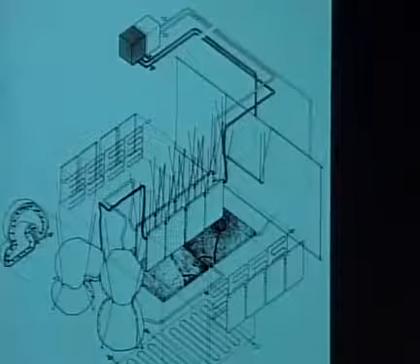It's an exploration of the perception of space using a full range of body perception mechanisms rather than just the visual ones. It's a hot plate, cold plate system—there's a system of hot water and chilled water within this symmetrical, visually identical bifurcated space. There's absolute visual sameness, but a range of other differences between the two sides.

And you're blinded by the light, which was a reference to the type of light you get in Alaska—this low, horizontal, blinding light that is felt as a sensation more so than as a visual wavelength of light. It's a kind of blinding light.

Within this blinding light, we constructed bladders and radiators and systems for bringing different heat sensations. Then there was saltwater mud that we brought up from the waterfront—one half of it was cold, clammy mud, and one half was very warm mud. So there were very different smells, very different sounds, very different kinds of sensations.

Within this physical structure, we were very interested in how do we visualize this thing, having first denied our visual reading of it—how do we give some visual form to our other senses? So we started exploring infrared video, and we were able to perceive the space as this much more complex, dense space. In this case, this is the real person, and we're not seeing visual wavelength light—we're only seeing heat energy, the heat reflection embedded within the architectural construction.

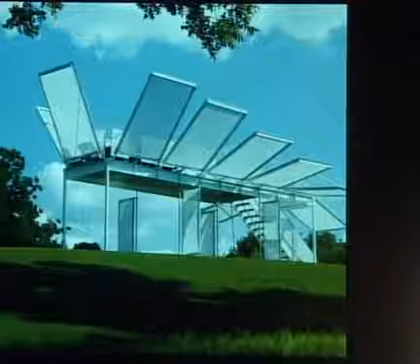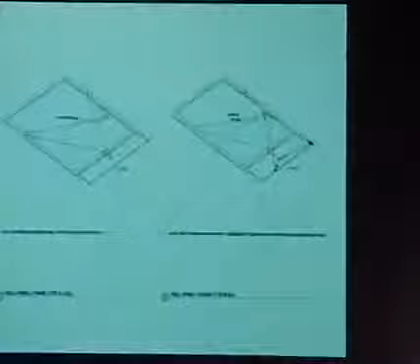More recently in Texas, we built a small structure—a shade structure, shade pavilion, and living roof demonstration project. It's a kind of traveling, folding mechanism. But all of these things are armatures for the creation of experience. As a construction, the actual form and material construction of it is less interesting to us, or secondary in its design focus, than the sort of perception and human experience that it makes possible.

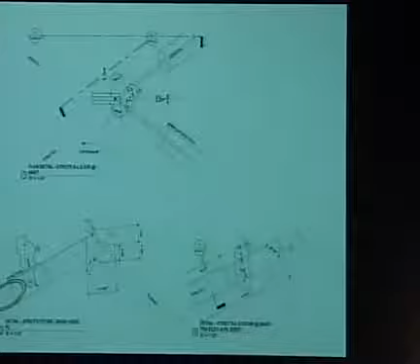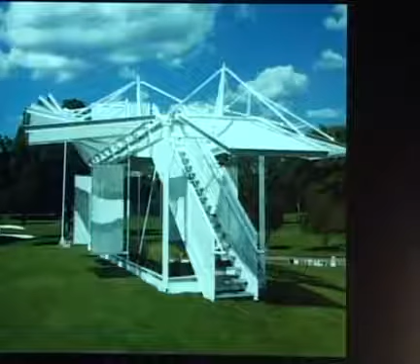And these are things that we'll show you in some of the other built projects. So there's that background of the subject matter, the interest in terms of what we're producing that's a little broader than just the details. The details themselves are interesting, but details on their own are not really the objective of architecture.

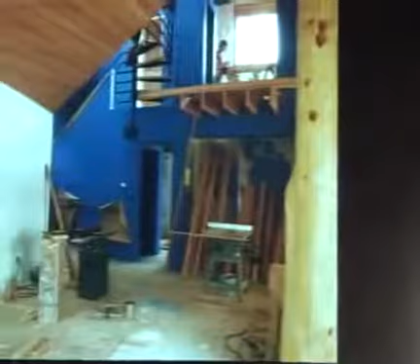So that's the landscape, if you will, of the work that we consider site-built or site-dependent. Some of our work involves a combination of on-site and off-site production, particularly a series of houses that relate to how things are made and how they fit into the landscape. We started our business as a construction company before we were licensed as architects, and that gave us the opportunity to start designing things, but also a tremendous learning platform to learn about materials, space, and how things can connect to the landscape.

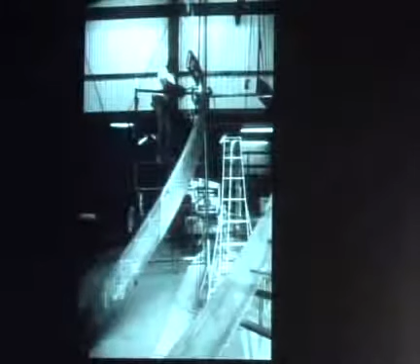So I'd say the study of the site and how a building goes onto the site is a central theme to all of this. It also sets the theme for the fabrication of any parts that are going to be brought into the site. Another part of the landscape, besides the physical, environmental, or natural landscape, is the industrial landscape, the set of tools and resources out there for making things. So in addition to studying the topography of the land, we're always interested in the topography or landscape of the means of production.

So for instance, with this complicated steel stairway, the first thing we did was try to find the places that could roll steel for us. This happened to be on the tide flats, the industrial processing place shown in the picture Mark showed at the beginning. The design came completely out of a series of conversations back and forth with the people who would actually be able to bend the structural members, and the interaction with the making, both our own hands-on part, but more and more working towards interactions with fabricators and people we could work with.

So we understand that in the same way a landscape is a rich source of inspiration, it's a collaborator in a way with any project. I think that influences a lot. We started working a lot with wood, and now more recently a broader range of materials.

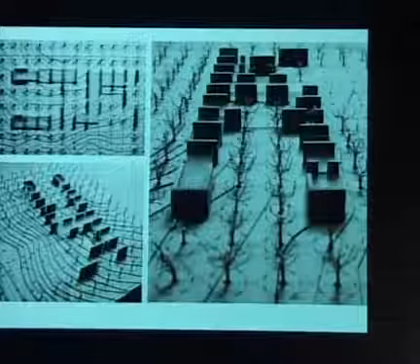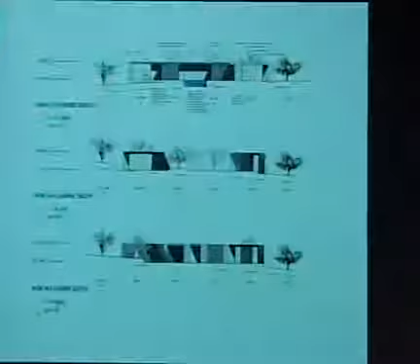Based on that, we started introducing building elements into this void, first in models. We modeled the whole thing, we modeled all the trees. And we decided that the solid building elements had to maintain the same rows as the orchard, because we were aware that the space of this site is the space between the rows of trees, and we didn't want to block them with buildings. So we said the rows of the trees have to all be glass or open space, and the solid concrete structure had to be on the line of the trees.

These are actually the construction drawings for the building. We put every tree—we drew or photographed every tree—they're in all the construction drawings, so there's no mistake for anyone working on the project that the project of the building is about the building and the trees. You can see from these that the trees are all taller than the buildings. It was one of the important goals for us, keeping the building within the context of the trees and lower than the trees.

So we made this series of concrete cast-in-place elements using mobile modular forms, columns and concrete elements, which are all on the lines of the trees. This image, looking out from the kitchen, is probably a good way of seeing it—straight ahead into the picture is the alley of space between the rows of trees, and on either side of us are the rows of the concrete columns of the house.

We're trying to create an atmosphere inside the house where the floor goes right out into the dirt and the ceiling goes right out into the sky, to connect us in. The whole wall system opens up as a series of doors—there really are no windows in the building, they're all doors, all made out of recycled wine casks made out of redwood. So there's a very limited palette of materials on the building.

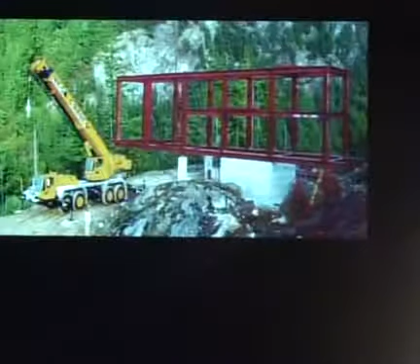To give another example of extreme interaction with the site, this was a beautiful 150-acre site up in the mountains north of Seattle. It had a very big site, but very little buildable area. The owner actually wanted us to design for another site, and we kept trying to convince him, and eventually did, that this was the site we needed to build on, one he thought of as unbuildable.

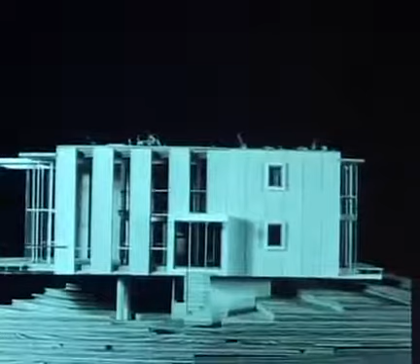What became important to us was to lift the building up off the site, make the smallest possible foundation, and then cantilever the building out in all directions. At one end it cantilevers 35 feet, and at the other end about 20 feet. It's a steel structural moment frame, a Vierendeel truss frame we designed to allow the small footprint and cantilever out essentially over this cliff. This is a very different kind of building from the previous one, which was about sitting low on the site. Here it made more sense to be up above the site and cantilevering out.

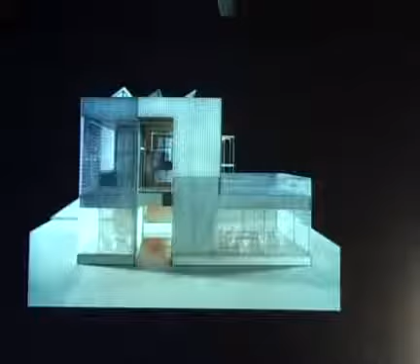Moving around the country, this is New Mexico now, a very beautiful and specific site on a river. The owners wanted a building that would be a house for themselves, but they also had a lot of domestic animals, in a very wild site in Abiquiu, New Mexico. They needed to separate their domestic animals, which included plans for goats and chickens, from the wild animals roaming the desert landscape. So the house was conceived from the beginning as a kind of multi-cellular cage — cage usually sounds unpleasant, but it's a very diaphanous, open cage.

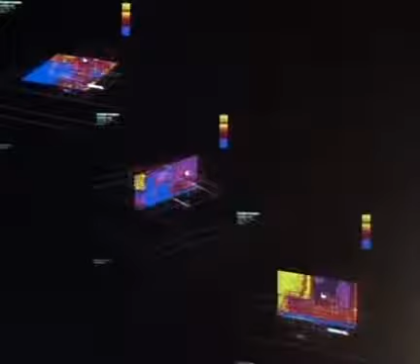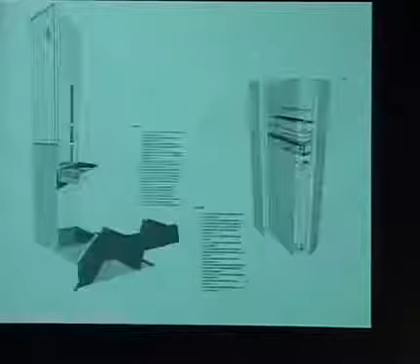The connection to the landscape included a very high elevation, so we did a lot of studies on how to get sun in for passive heating in the winter onto a concrete floor that would absorb warmth, while excluding light from those thermal retention areas in summer when the sun is hot. So we started doing a lot of work with Ecotect — I don't know if that's software you use — to study the many ways the building interacts with the site. I think this marks a transition for us, from the more intuitive understanding of a site gained from being on it, to using more analytical tools and definitive information to help form the ideas of the buildings.

Lastly in this series, another orchard project, very different — this is the one on the poster we saw. It's a house in Michigan that sits above a cherry orchard. Here, a tiny site is set within a huge agricultural landscape, and the goal was to get as high as possible, over the cherry trees, to look out at a view of a lake. The house is only 1,600 square feet, spread over 12 levels — really 5 stories, but half levels, with each room off half a level.

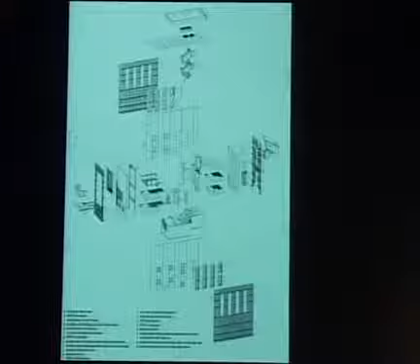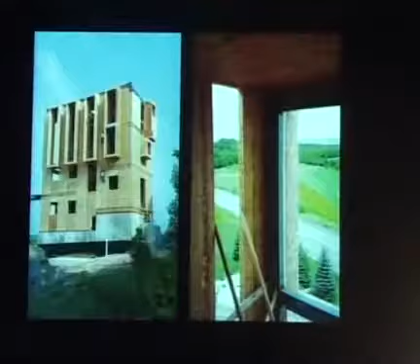In this case, the importance of the building to us was getting up high above the site. The exterior enclosure is all reflective metal surfaces, with a separate level of plastic louvers that collect and redistribute light. So part of the goal was to have the house set into the landscape in a way that reflects and changes with the four seasons it goes through. The building reflects the sky — we call it the chameleon house, because it changes with the seasons and the land, reflecting its surroundings. It's not trying to blend in, but to become a connected, integral piece of the landscape. That's the series of very site-directed projects.

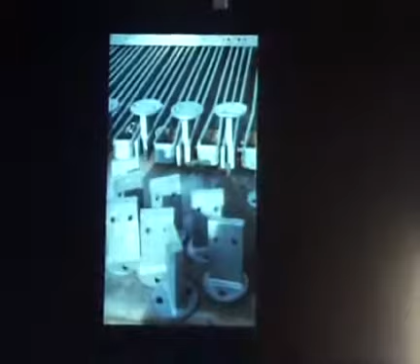But just as there's that kind of specific landscape, there is this kind of production landscape that we work within. And we've always been very interested in affordable methods of housing production in particular, and building production. We've had the opportunity to build some pretty expensive buildings for fairly wealthy people, but that's never been our primary interest. Our primary interest has been to figure out how we can make good buildings available to everybody. So we've always had this kind of parallel emphasis on figuring out a production method that is affordable, that is effective in some way.

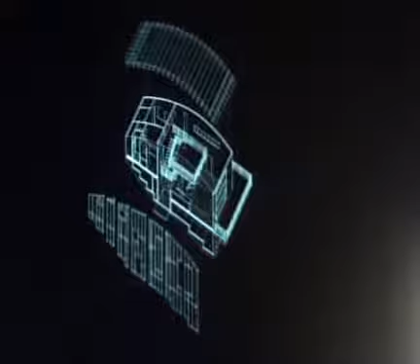One of our early projects along these lines was a house we built on Fox Island in Washington State about 20 years ago. That was one of our first prefabricated buildings that we did completely ourselves. We'd actually been working on a number of other things earlier, including for some other architects. But this one was a house for a young woman who was a teacher. She later became a firefighter, and a very interesting person, but somebody who didn't have a lot of money and wanted to do some of the work on the house herself.

So we had to really figure out how to make something that could be built very fast, very affordably, and so we developed a kind of panelized production system. In this case, we rented a warehouse and used our own construction crews between other projects and prefabricated the thing and then set it up on the site in a fairly rapid way. So that was one of our early investigations in prefabrication.

But we've always been working on numerous projects in different methods of prefabrication. This project here is in Kumamoto, Japan, where we've also done a lot of work on prefabricated buildings. This one was finished just a couple of years ago, and it's a CAD/CAM timber frame building.

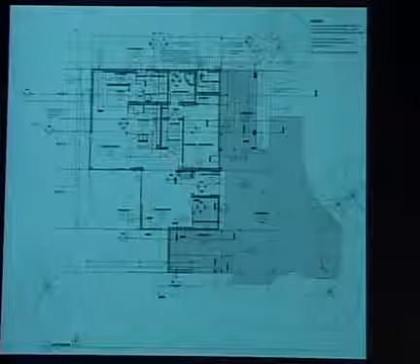So this again is intended to be - and of course in the San Francisco area, everything is kind of outrageously expensive anyway - so when we talk about an affordable house, it's still a $1 million house. It's not affordable to most of us, but compared to other things, it's a less expensive way to build. So it's a very compact, very simple house on a small site, so much of the outdoor yard space is on the roof of the house.

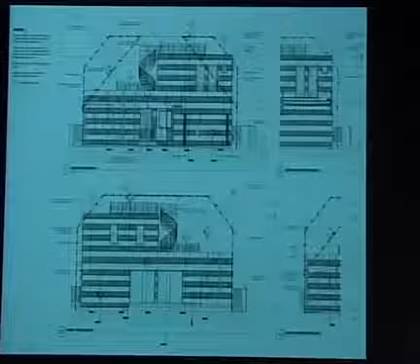This is a plan of the modules. It was trucked down in 5 modules, and each of these needs to be designed to be detached. So there are some kind of special design issues. But then the idea is to put it all back together - it's completely built in the factory, then taken apart and brought to the site. You can see they're kind of simple box-like structures, but trying to embrace that simple box-like quality and give lots of indoor-outdoor space in it.

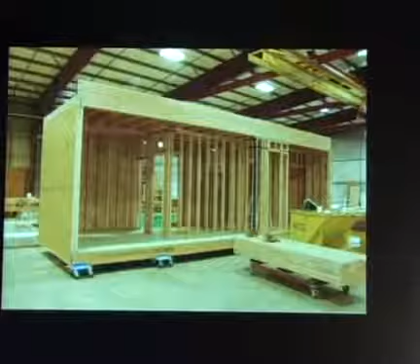So this is the beginning of the work in the factory in Salem - this is the process - and here's the house going together. It's basically very simple materials, but it's got a few special features, including this kind of wall full of holes that encloses a small bamboo courtyard.

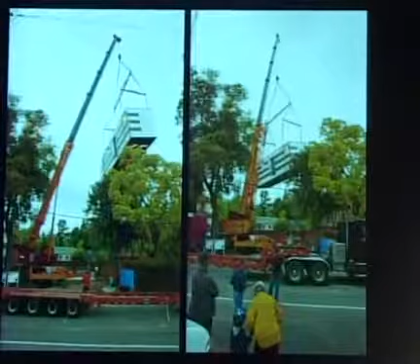It's just hardy board, simple cement board siding, so very inexpensive, but put together in a way that is a little less typical of the use of it. Here it is going over the wires and over the trees and being set in place.

Once it goes together, then at all of the module lines, there's a kind of knitting together of the pieces, and here you can see it's finished inside, but there are some areas left to be bolted together and then finished.

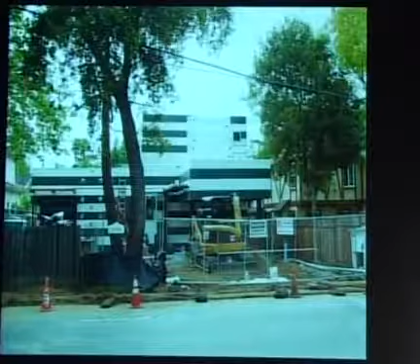So this is the interior and the courtyard wall, and this is about what it looks like now. It's just a little bit beyond this, but it looks like it's kind of fit into the trees, so it doesn't really look like it was trailered in.

So we've been increasingly interested in modular building recently because it's a little different from other modes of prefabrication. It's the kind of true promise of prefabrication where the whole thing goes together. So I'm going to show you a few more examples of current and recent modular building projects that are not residential, not houses.

So kind of thinking of the larger landscape of education-related projects, we're very excited to have had a chance recently to get involved in some projects more about education facilities, because we feel like putting the effort into very intensive design and development of things makes more sense for something that can be benefiting more people than just a single-family house.

And so in particular, this project, which is a zero-net energy classroom for Hawaii, we were part of a competitive process to find the best proposal for what's supposed to be the new generation of portable classrooms or relocatable classrooms for the state of Hawaii. They use a lot of them.

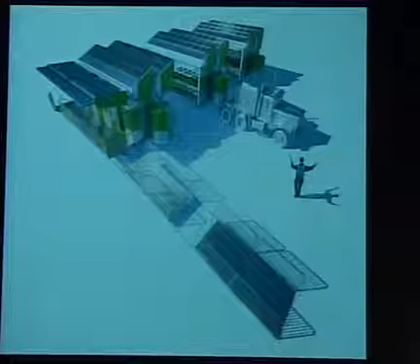Many of the classrooms they have are in very poor condition. So they decided to have this kind of idea to have a prototype for a zero-net energy classroom. So our project was selected.

These are images of how it will break down into modules. It's actually under construction right now, so it is being built as a completed building, but we approached it very much as a system of parts that can be deployed.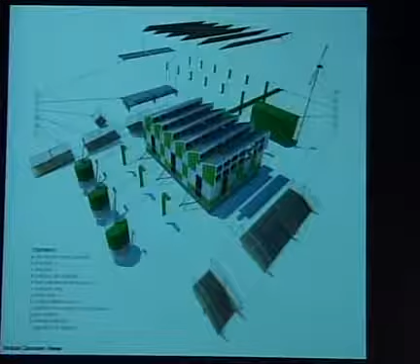There's a wide range of climate throughout the Hawaiian Islands, and they say that eventually they have as many as 10,000 different units spread out through the islands that will need replacement. So we wanted to approach this, even though we had a specific site for the initial building, very much as a flexible system to adapt to different environmental needs in different areas of the islands.

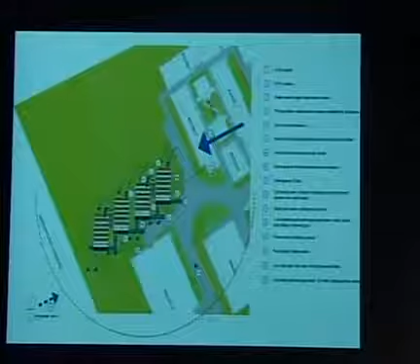So we really approached it as a machine for, first of all, reducing its energy use. Even before we started collecting energy, the idea was to reduce its energy use to as little as possible. So that happened through daylighting strategies and through natural ventilation and cooling. So it won't be air conditioned, which is rare in Hawaii for classrooms.

So a lot of study. We had a really terrific team of consultants from all over the country helping work on this and helping work out all the different strategies for natural cooling and daylighting and water collection and storage. So even though it's a very small building, it's only 1,000 square feet, it's one of the most studied buildings. It's been modeled in every kind of software, and it's studied up one side and down the other.

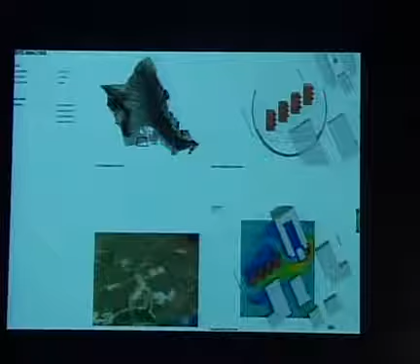And we hope it will perform. So we have all of this performance data that was required as part of the state of Hawaii's selection process. So it was a very kind of rigorous process where we had to model everything, and now there will be a monitoring process once it is installed and operating to see how well it matches according to the projections.

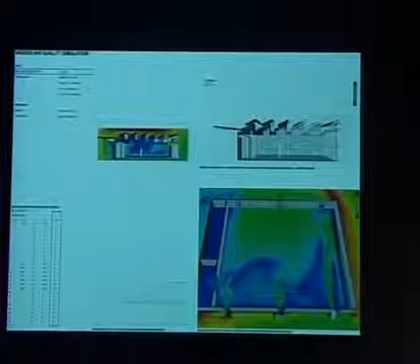So that's an interesting new kind of landscape that we all have to be aware of and design for, which is kind of standards-based design, where there are performance standards for how a building will perform, and we have software tools now to be able to do extremely accurate modeling, or at least we hope it's accurate, because we hope that the building lives up to its expectations.

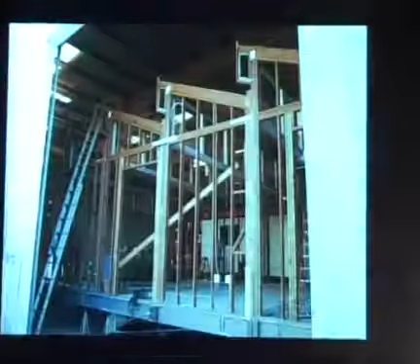This is under construction at the same factory that built the house Mark just showed previously. It's here outside of Salem, at a place called Blazer Manufacturing. These are pictures from our last trip up here about a month ago. Tomorrow morning we get to go up and see it in an almost finished state, so we'll have fresh pictures after that.

But this is the building under construction in the factory. It will be disassembled into pieces and then shipped to Hawaii. These images show the system approach we developed, with a number of different roof lines and characteristics for different climates.

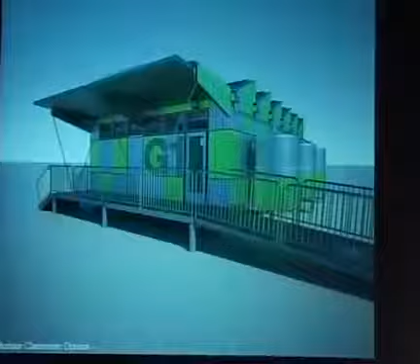So for more southerly latitudes, or as far north as New England and Boston, we have different variations. This is a version we developed for a site in Nevada. This series of images shows how the exterior can be changed, branded, and adapted for a wide variety of applications, both educational, research, and technical.

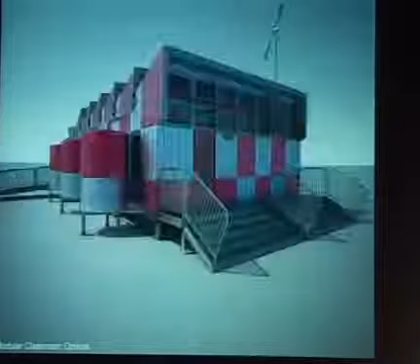The other education building we just finished, about 2 years ago now, was the one we were selected for the Hawaii project. It won a number of awards, but it didn't get built because it was slow to get going. In the meantime, a new project came in that had to be designed and built in 6 months. It came in as a result of the work we'd done on the Hawaii one, but it actually got designed and built first.

This was a child care center for Harvard University. They needed a 2-year space while renovating some of their larger buildings that had child care centers in them. It was a very controversial thing.

The Harvard campus has a lot of people watching it all the time for what they're trying to do. They have a tense relationship with their neighbors, so the idea of putting in a temporary building had to be something the neighbors would accept and which would perform very well. It was a high stakes project with a lot of people watching, and it also had to be done in a very short period of time and at a very low budget.

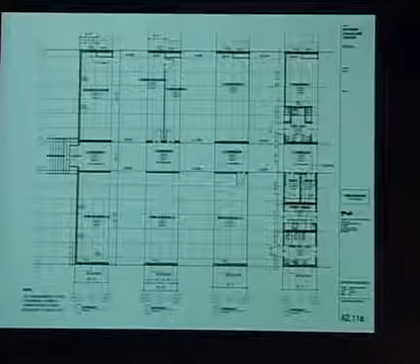This project has a much lower budget per square foot than the Hawaii project, but it had very high ambitions—not so much for energy production, since that many solar panels is expensive, but for energy conservation and healthy indoor air quality. As a child care center, it had to meet a number of very stringent inspections and regulations for material toxicity and healthy indoor air quality.

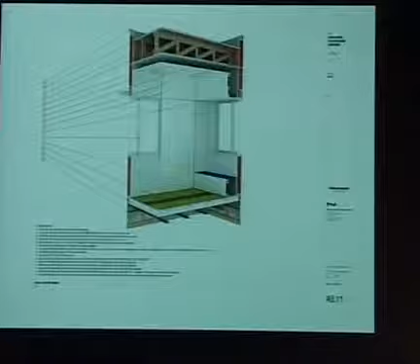This building was built in 8 modules, constructed in Illinois at a factory and then trucked from Illinois to Massachusetts. Part of what was interesting to us was working within the context of the commercial and industrial modular building industry. It's not a very progressive industry, and bringing in a green, high-performance building was a bit of an uphill battle. We had to challenge and change a lot of expectations, and we had to do a lot of learning ourselves about how the industry and process works.

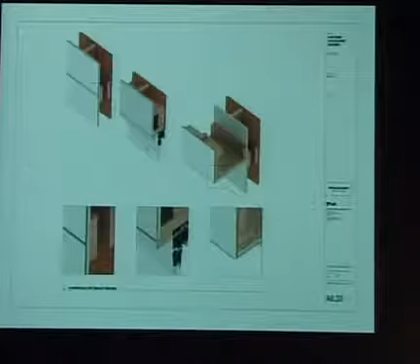Along the way, we did a lot of digital modeling—we work in Revit primarily. We did very detailed modeling of every component and part, because once our drawings went to the factory, it had to happen. It was built in about 6 weeks with no time for asking questions. What we know from the industry is they don't always adhere to architects' drawings, especially if they don't understand something, and there's not a lot of time for back and forth.

They'll make a decision and go on and complete it. So we had a very good relationship with these builders—we went back and forth very quickly, and we completely digitally fabricated everything in our modeling, giving them drawings that showed exactly the sequence of construction. It worked very well for building rapport with these people, because we were essentially building it digitally before they had to build it physically, working through many issues in advance.

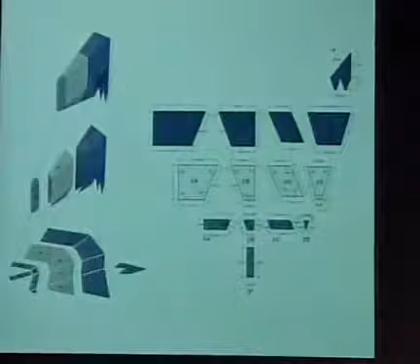So a lot of very custom fabricated parts besides the primary module. We were trying very hard to make it break out of the image of a modular building and to have a connection to the landscape.

These changing images, it had a very interesting program that it would be used for 8 months for one child care center, and then the second 8 months for another child care center as they moved it around. So part of the goal was to be able to differentiate it as it changed roles.

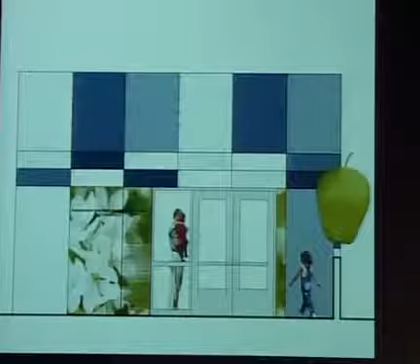So we had the frog and the cherry blossom front. But the other part that was interesting from a digital fabrication point of view was this apple that we designed. We wanted this connection for the children to be kind of a fun image. And the apple was digitally fabricated. It was modeled by us, and then all of the parts made and cut, all CAD/CAM manufactured.

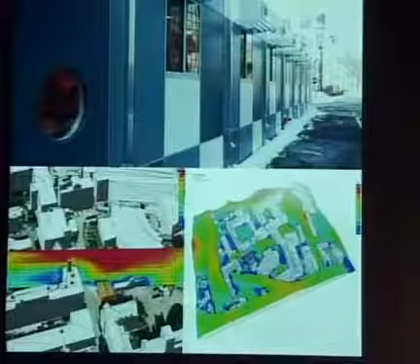These are all the drawings that we did. These are the cut drawings for the milling process. And a lot of work went into the apple, but it was a tremendous learning experience for us working with good fabricators. So that's kind of the total of the modular building interest shifting from the residential into the commercial and education realm.

So I'm going to show a few things that we've done with students. And it's very nice to have here today some of my former students, which makes me feel kind of old, but it's still nice to see both on the faculty, which makes me feel really old. But Aaron on the faculty is a former student, and Hala is a more recent student, a graduate student here.

So Peter and I have had a chance to do quite a few projects with students over the years. And so we just want to show a few of these related to the other work. This was a project, and Aaron might remember this. Were you here at the time, or there at the time? So this was done at Berkeley a few years ago.

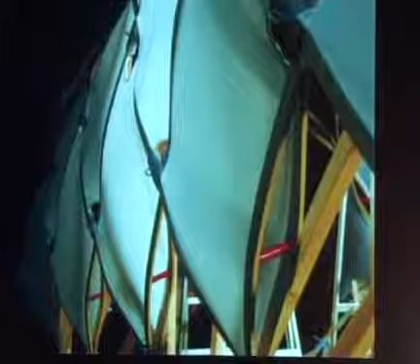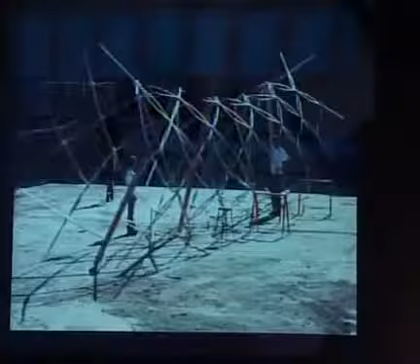It was called Swell, and it was at a time when students were becoming very interested in parametric modeling and dealing with the idea of buildings actually changing in response to dynamic phenomena around them. So responding to the number of people that would be in a building, or responding to natural forces, but responding in an active way.

So the challenge was, if we're going to talk about buildings being responsive, it was very popular at that time to be drawing buildings that could get big and small depending on how they were occupied, which is kind of a difficult thing to imagine for an architect. How are we going to make that? But so we took on the challenge. We're going to make a building that can be either big or small, depending on how many people are in it.

So in quite a short time, the students made this pretty amazing structure, and they built it on an upper studio floor. But you can see here that the structure can collapse into about a 2.5 foot diameter, and it can swell up to be, I think, around 18 feet in diameter.

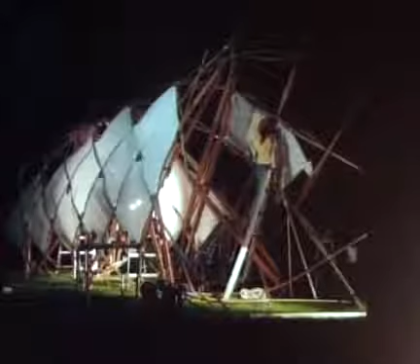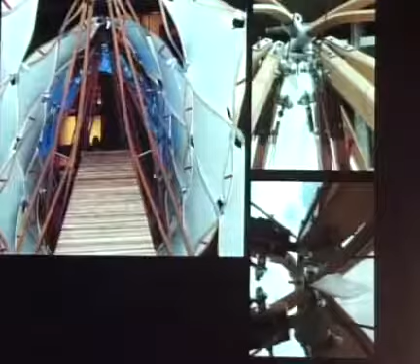So it was all based on this kind of a mechanism of scissors that could be responsive. So there's this inner scissors that forces the scissored outer skin to change in size. And the whole thing is pretty elegant except for this one kind of clunky element.

But this floor element is the bridge that people walk into. And the more people who walk onto this bridge into the interior of the space, the heavier it gets, and the more the bridge kind of flattens out into a flat floor. So as the floor flattens down with the weight of the people, the building swells around it. So if there aren't many people in it, then the building's small, and if it fills up, you have a flat floor and a big building.

So it was an interesting challenge for them, and they came up with some great mechanisms, both to create this sort of flexible structure and then to mechanize it and make it responsive. And it has this kind of tensile fabric skin and a very lightweight, flexible, but quite strong structure.

So more recently, we did a project with the students. This was right after the tsunami in the Indian Ocean, and at the same time as the earthquake in Kashmir and the Katrina hurricane in New Orleans. All of those things seemed to happen in a very short order.

Since then, we are increasingly aware that there are going to be increasing weather events and disasters, and as architects, as people dealing with the world, we have to start understanding our landscape in a much more dynamic way and being able to respond to it. So the Swell is about responding, and this project we called the Life Bean is about a response to disaster relief.

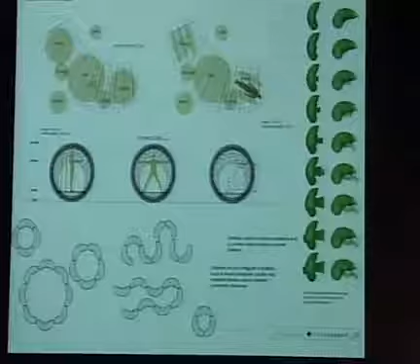So it became of interest to make shelters that could have a kind of long-term, life-sustaining ability, and that could be not so reliant on being able to fly in lots of supplies and things, but it had to be something that was life-sustaining within itself.

So in this case, that meant it had to filter water, it had to capture water, store water, filter waste, create a range of ventilation or warmth.

So they had fairly complex parameters that they wanted to deal with, including this thing had to be collapsible, it had to be lightweight, it had to be able to fit in a helicopter. So they had a certain size criteria that they were dealing with.

So they made lots of mock-ups and experiments, and then material experiments, decided to work with bamboo because it would be a strong material, but one that could be sourced anywhere in the world, so that these things could be fabricated anywhere and stored, ready to be used.

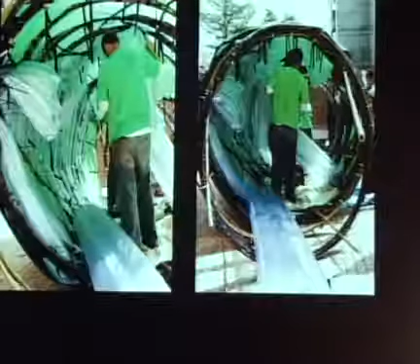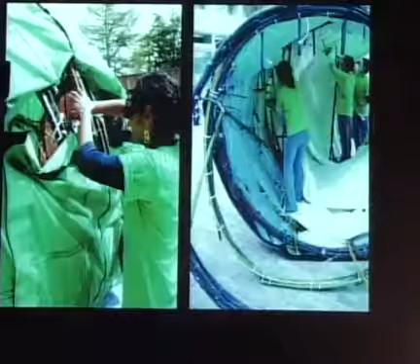So it's a kind of spring-like bamboo form. These things were steam bent and formed into this kind of spring that could collapse into a small disc or be elongated. And then it has a number of different layers that have the ability to capture warmth and store water and open and close.

And so, like all of these projects, there's the kind of energy of making them, and then there's a great energy of occupying them. And that's, of course, the thrill of architecture. When you make something, then you get to experience it and have it around you. So there's always a great party after making some of these things. And it's very exciting to have an idea, especially a challenging, difficult idea, and then figure out how to make it.

So this project is called the Hot White Orange, which is a story in itself, why it's the Hot White Orange. But the challenge for the students in this case was we wanted to make an outdoor amphitheater in Berkeley, which is a place that's usually sunny or frequently sunny during the day and almost always cold at night. We wanted to make a kind of large furniture for about 30 people to sit outside and watch movies outside in the courtyard of the architecture building.

So to do that, we decided we would use the form of an orange as the kind of formal basis for the design, because we didn't want to waste a whole semester figuring out what the shape of this thing was going to be. So we just said, it's going to be an orange. It's going to be made so it's a sphere. It's going to unfold in its segments so that when it folds up, it conserves its heat, and when it folds open, people can sit in it. And it's going to be solar heated.

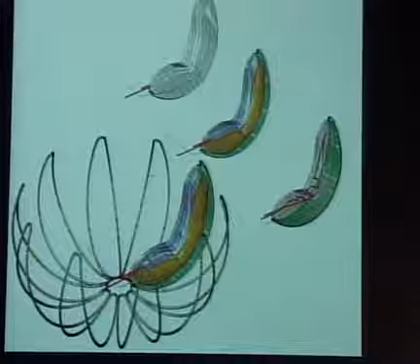So this was digitally modeled, and there were separate teams for all of these different functions: a structures team, a primary enclosure team, an interior plumbing team, but they were all able to share one digital model so that all the geometry would match, and they could fabricate all their pieces and then bring them together.

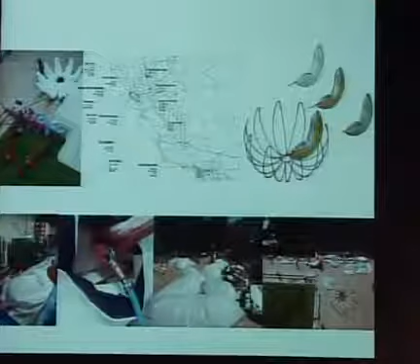This was a map of where they had a lot of the parts fabricated around the West Coast. Some parts were manufactured and some parts were made by the students. They brought all of these things together, and then after making them all separately, in 2 days they had to put it all together.

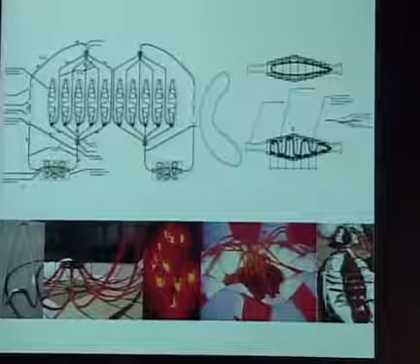So it's a fairly complicated system: a solar hydronic catchment system that goes through a solar pump, and it pumps the water during the day. It's collecting heat and pumping it through these internal bladders in the orange, so that the larger volumes of water are heated. Then at night it unfolds, and it's like a big hot waterbed to sit in.

All of these systems, the plumbing systems, required a lot of research and interaction. Each student group — there were about 35 students working on the project — they each went out and found their plumbing mentor, their electrical mentor, and did a pretty amazing job putting this thing together.

The only thing they really argued about was what color it should be. It seemed obvious to most people that since it's orange, it might as well be orange. But surprisingly, that was very controversial. So it was decided it would be white, but there would be these orange cloths that could dress it on certain occasions. So it's called the Hot White Orange.

So then the most recent of these student projects is called the Enormous Plastic Rainflower, which is kind of a joke — we call it EPRF. There's all these fancy construction plastics with 3 or 4 letter names, but the EPRF in this case is the Enormous Plastic Rainflower.

The concept was, first of all, the school had no money for construction. There was no support for the class, no income available, no donations. So we had to make something out of absolutely nothing. The idea was, what could we make that could be big, structural, but would cost nothing?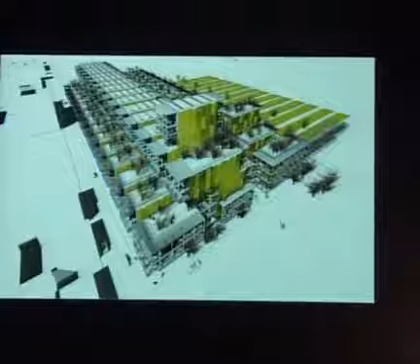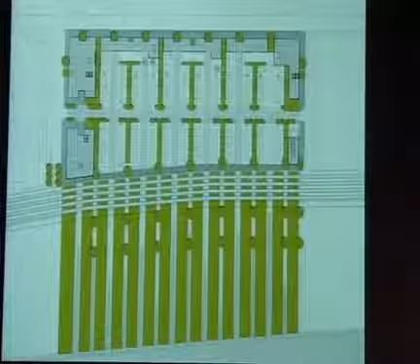It was a big competition, and our project was a winner. It was a timely competition because this was in 2006, when there was worldwide interest in post-disaster construction. So it was invited to be in the Biennale, the 2006 Biennale of Architecture in Venice. Much of the imagery here, the models and the components, were produced as a result of that invitation to exhibit the project in Venice as an example of high density, highly environmentally adaptive housing.

It was a very interesting project for us to connect some of our interest and background in prefabricated building systems and show how those could be connected on a much larger, more urban scale. It was a very rich system of environmental adaptation for this building.

It was all about creating the opportunity for a building to essentially be a sponge at times when there's heavy rainfall in many cities. In New Orleans, part of the problem is that there's so much rain and not enough way to absorb water. So we were looking at buildings being able to absorb and slow down the absorption of water into the urban city from above, by having a series of green walls and green landscape, all within a prefabricated system.

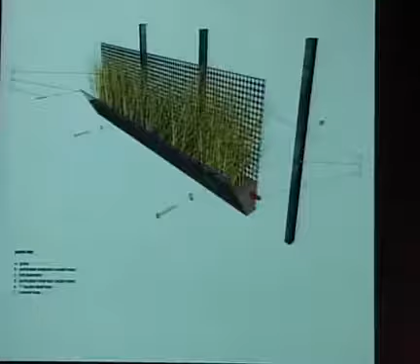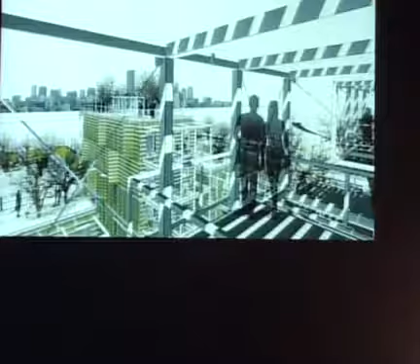So the walls themselves have these planted systems. The buildings were part of the water absorption solution, but the other part was absorption from rising water. Everyone knows the flood in New Orleans was caused largely because levees failed that were designed to hold back the floodwaters.

Part of the project, one of the most important parts to us, was the design of soft replacement levees, these sponge combs, as we call them. In this animation, you see them moving from their deflated condition when the waters are low, and as the floodwaters come up, the sponge combs expand to, in principle, create a solid wall or dike.

It's fairly simple in concept, because there are superabsorbent polymers that have been developed and are used in oil spill cleanup and also baby diapers, all about trying to absorb large amounts of moisture. Most uses of them so far have been about cleanup, like collecting oily water or absorbing water in. Our interest was the secondary aspect: as these polymers gather water in, they physically expand.

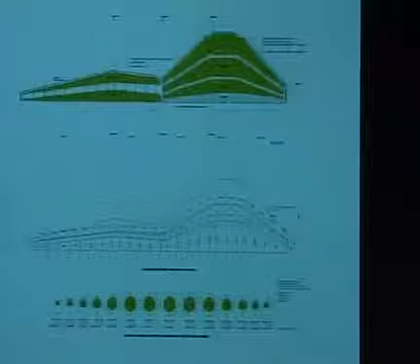We wanted them so that when the sun comes out, you dry out the polymer, and it actually contracts again. So we wanted there to be an internal harness to these structures that would be elastic and help squeeze the water out and pull them back in. There's no energy other than the energy of the expansion of the water and the drying energy. There's no powered energy.

And so we ended up designing and then building a whole series of these small-scale models, then larger-scale mock-ups. It was a really fun process for us in our office to be so hands-on for the making of these.

They were then put together. We had a large team, and they were shipped to Venice and installed in the courtyard of the U.S. pavilion in Venice, and inflated, and they became this very popular element, partly because there weren't many places to sit down, and these were extremely comfortable, as you can imagine. Once they were filled up, they became these giant water bag elements, but they became kind of a center point in that year of people wanting to come and sit on them and interact with them.

And we kind of think that's the perfect antithesis to the concrete levee walls that failed in the hurricanes of the Katrina hurricane. Here's a protective device, an urban protective device, that becomes this kind of social gathering space.

Here's our artist's rendering of a whole series of these protecting Piazza San Marco in Venice. And final image there. I'm going to just skip ahead to our

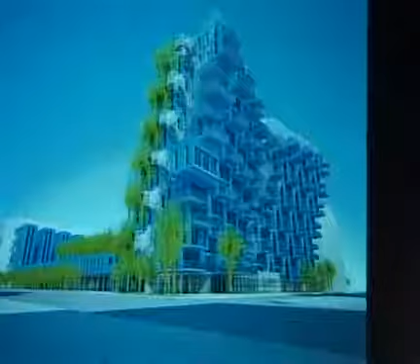Final project to show you sort of where we're at right now in a current project. So I'll turn it over to Mark here.

So with the, that's supposed to quit at a certain point. What happened? Okay, good.

So in the New Orleans project, this levee system, the temporary levee system, was a kind of ancillary part of the project. It created this ability to go back and forth to the waterfront from the city, but it wasn't the building itself. But through all the research on that project, we became very interested in the possibility of other sorts of urban infrastructure that could use this superabsorbent polymer technology and become a kind of interactive part of the urban environment.

So our proposal, and we haven't found a place to build this yet, but the proposal is for an urban water tower, essentially, that isn't dependent on bringing water from somewhere else to fill the tower, but instead it's a kind of localized water collection apparatus—water collection, filtration, and storage apparatus. And it occupies

co-occupies an office building tower, because office towers have all of this surface area available to them. So our thought was to take the surface of a building, to create a new building that could be occupied with the office program, but would also have this mechanism that would be kind of symbiotic with the human occupation of the building.

So it collects water. It's a system that extends, so it's called the Lips Tower. So there are lips and tongues in the system.

And the way it works is when the building needs ventilation, the lips open, and when the building needs shade, the tongue sticks out and shades the surface of the building. The surface of the tongues also has a photovoltaic membrane surface on it, so that when they're extended to create shade, the top of it is creating energy.

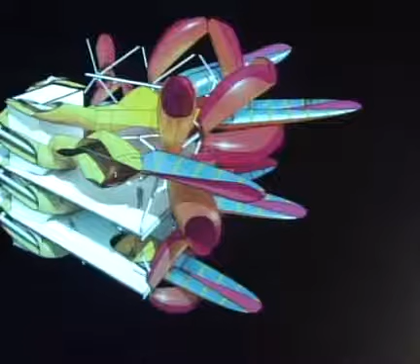And when it's raining, the tongues also stick out to collect water. So it's completely interactive with the weather, and it records the weather. The kind of urban landscape that it creates is one that's very dynamic, very interactive, and the building changes shape, changes form according to the weather and the time of day, and is always in motion.

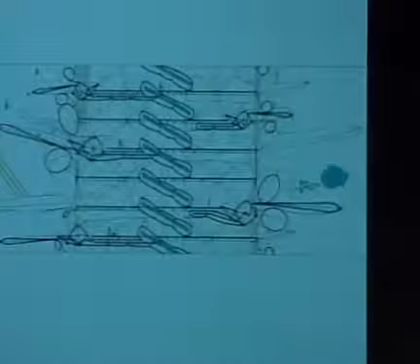So these don't take energy to power them. It's all powered by this kind of hydrophilic superabsorbent polymer in these big padded bags.

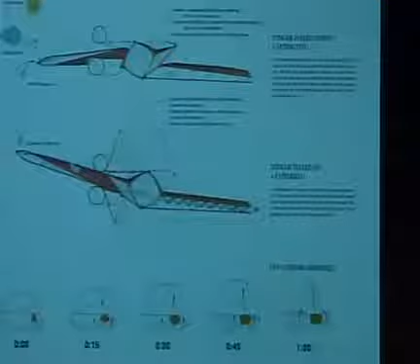So we're using the same system of the levee at the ground level, bringing it up into the sky, and having it respond to nature, collecting the water. So the tongues collect the water on the surface, both by condensation and by direct catchment of rain. It comes in, filters through this, and cycles down into storage within the cells of the building.

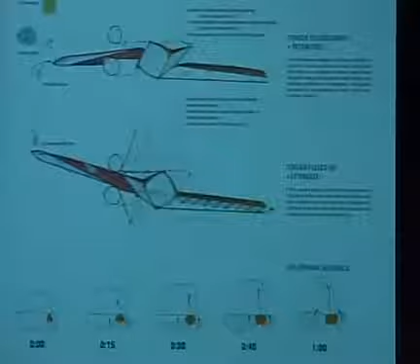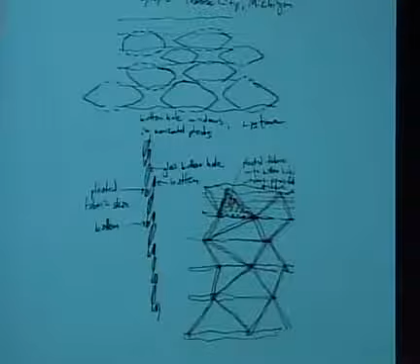And the muscles, essentially, in the sides of the throat that send the tongue in and out are caused to fold and move by the swelling of the moisture content in the superabsorbent polymer. So through valving, it's responsive to input from the weather data. It valves in and out of the polymer and swells or contracts, and without any applied energy other than the valving, it changes its form and extension.

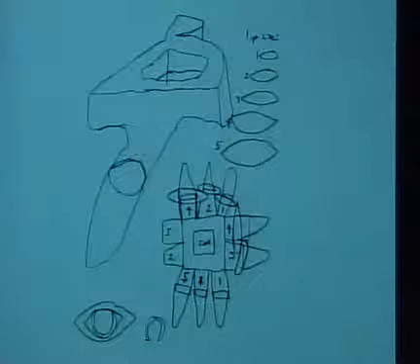So these are some of the studies of the tower frame. These are diagrams of the system. And just like the sponge comb system, this is a fabric system that is all 3D modeled, digitally unfolded and cut fabric, and then sewn up as this kind of large fabric structure.

So we made lots of models of this, just as with the sponge combs. This is a model of the appearance of this building, with most of the tongues extended. So the building form and color would change dramatically depending on how it opens and closes.

This is another model, a more detailed model of the structure and the mechanism itself, to test how this thing actually works. So you can see the building extends its tongue, collects the water, and it actually swallows, using this mechanism, brings it deeper into the structure.

On the one hand, it's a very practical system. It also, we think, is quite beautiful. Absurd, but not entirely absurd. So just in closing, well, that's a good enough closing. Thank you.